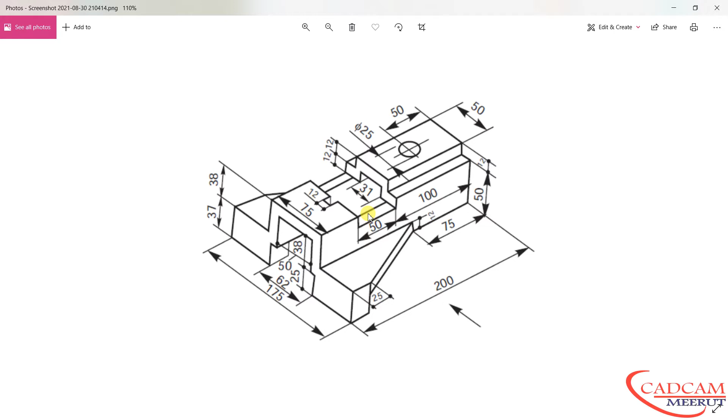So let's start with the NX. Select this sketch, or we can select this sketch directly and click over the plane.

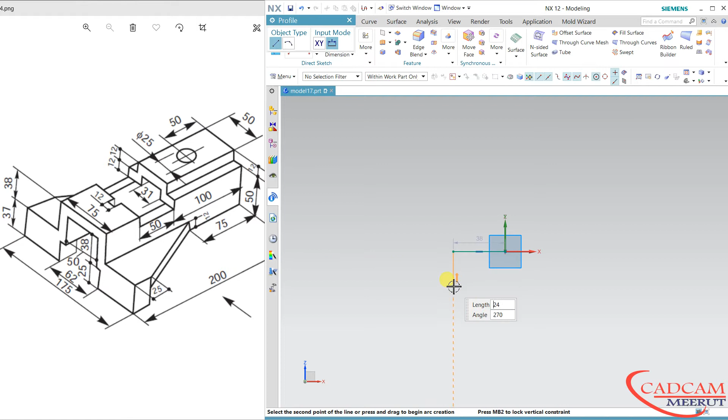I will create this portion and we will extrude this 25 only. So just start with profile. We are starting from this point, and after that I will mirror it.

Make them coincident. Now dimension it: 75 divided by 2, 38, 37, 25. This is 25.

38 again, 50. So this is 25 and 62.

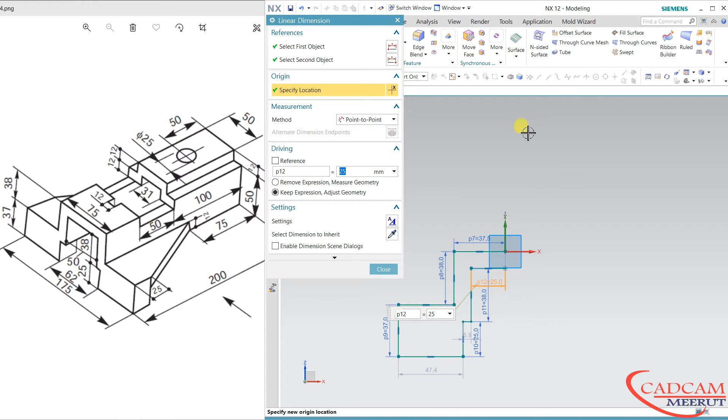So wrap it. Half of 62 is 31 and close. Now mirror this hole. One more dimension is left.

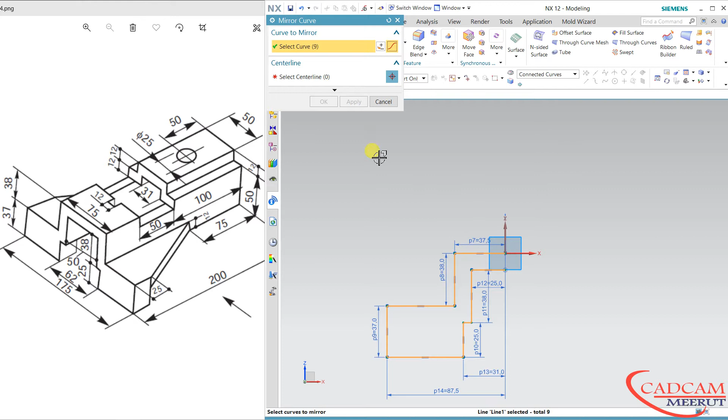This 175 divided by 2. Close, and now we will mirror this. Select this mirror, connected curve, so all curve is select the axis, and OK.

Sketch is fully constrained, so finish this and extrude this all in 25 millimeter and click OK.

So first sketch is completed. Now we will create this upper portion only.

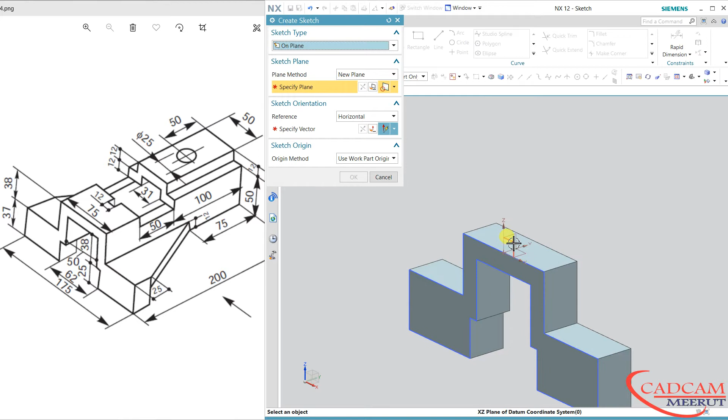Again I will sketch over the same plane, and draw this shape.

Actually we need this sketch. Okay, after this first we have to create this shape up to here, and again this shape has been changed.

Now finish it and extrude this sketch in reverse direction.

Or we can do one thing, just extrude this second portion up to 200, and now I will cut this portion.

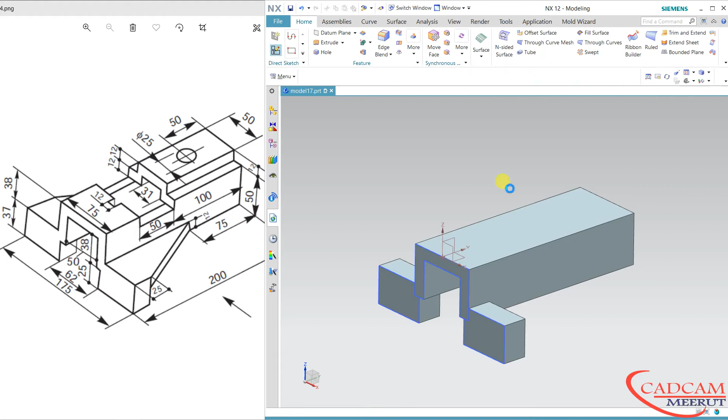So sketch over this face and draw rectangle and dimension it 100 plus 50, 150. Close. Now subtract this.

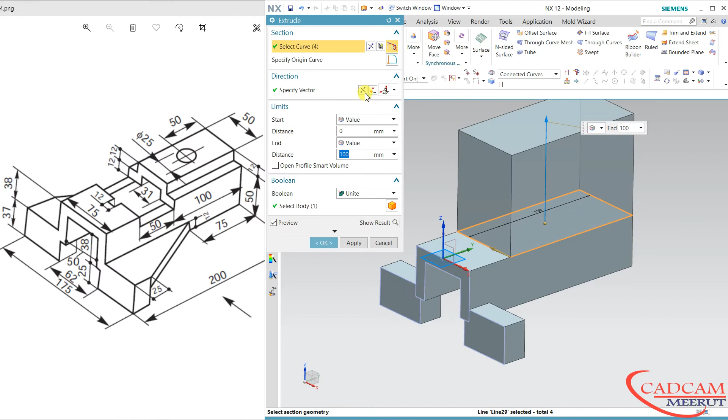Extrude and reverse direction and subtract this to 12, because this distance is 50 and this is 12 mm extra, so 12 and 12, so we will cut 12 millimeter only and subtract it, and okay, so this gap is come.

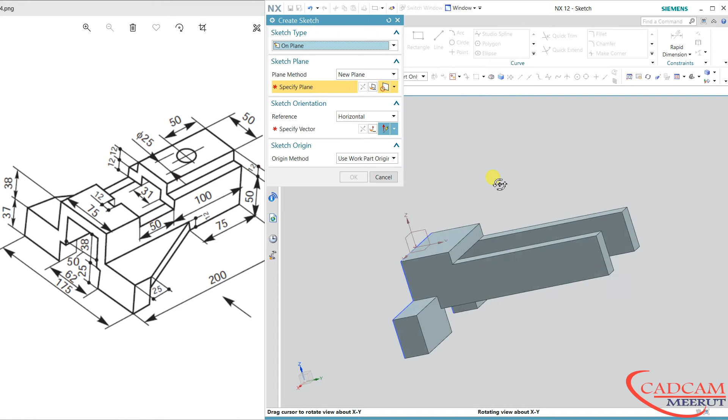Now we will offset this, or we can do one more thing, go to this back face, click, and now orient this with this view, and now I will start from this point.

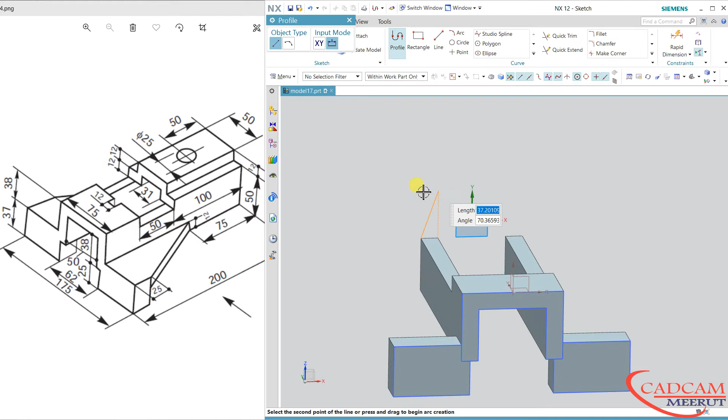Okay, here, then 12 mm above here, and match it to this point. Now a little bit inside, up, in, now match this.

Okay, just match some dimensions, meaning these two lines are equal, and this line and this line both equal. Click and make this line horizontal, and rest are same, just click both this line and make equal.

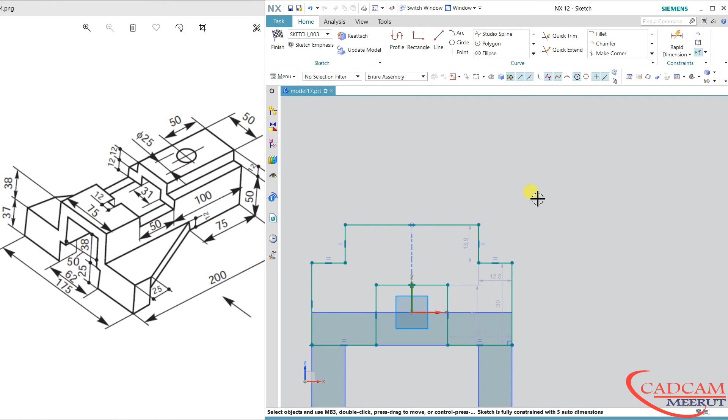Now this point and this vertical axis must be constant, same for this lower line. Now we will dimension, this upper dimension is 50, so select and change it to 50, and this depth is 12, change to 12, and same here, this line is also 12.

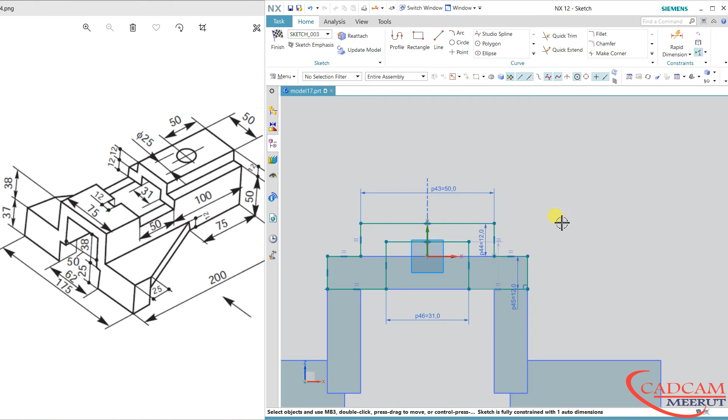And this inside diameter between these two points is 31. It will automatically distribute, and here we have to define this gap. So this is 12.

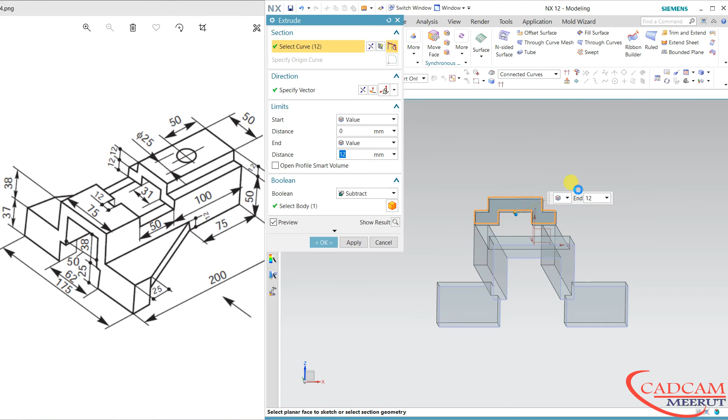Now close and extrude this sketch 12 and subtract, and now see.

Our figure is matching with this isometric. Now we have to create this rib, so sketch over this face and draw a line.

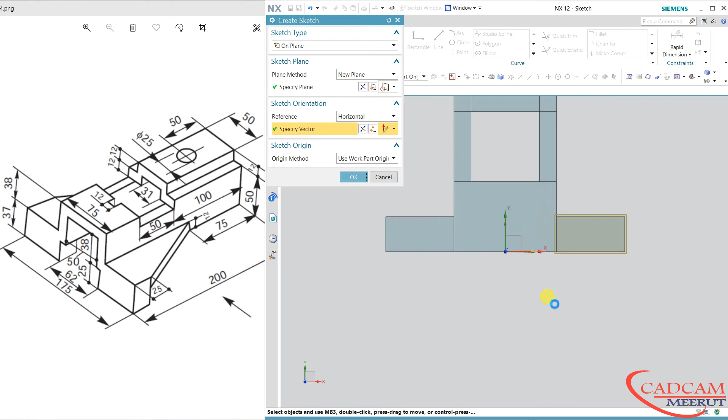And same for this opposite point, or we can mirror it. 75 from the last edge, 75.

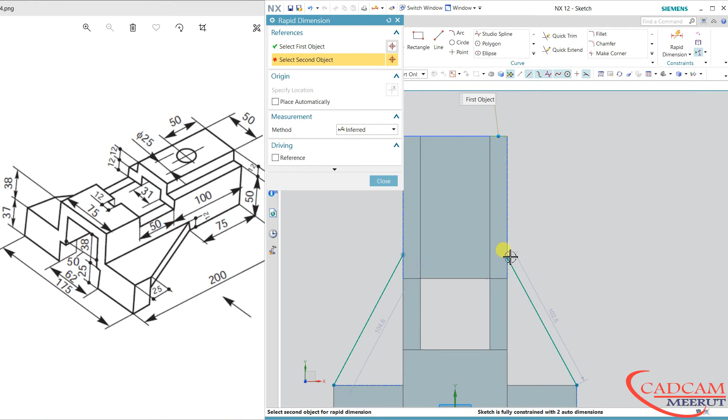Click, match both points horizontally, finish it. Now I will use rib command to create this.

And we will select single curve, select this curve, and thickness is 12.

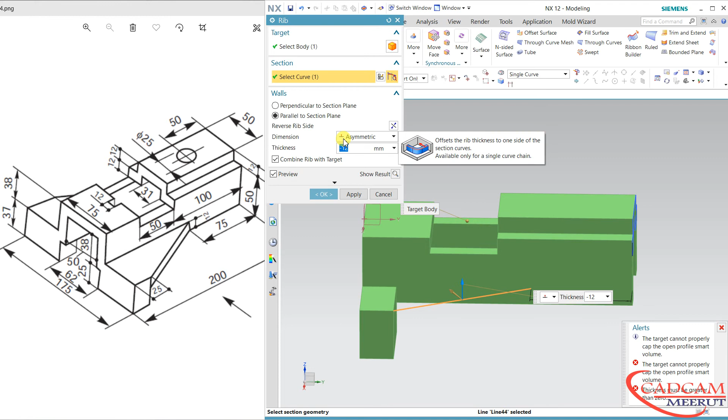Okay, symmetrical, this is not possible. So asymmetric, and minus 12. See. Okay. Now apply, and same we will do with this sketch.

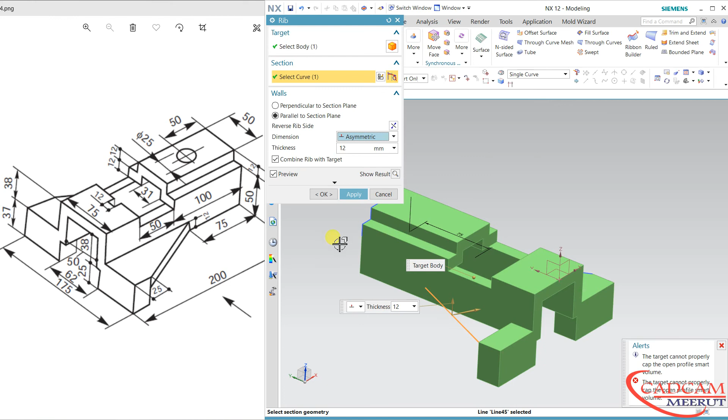Asymmetric 12, and double click over this arrow. Arrow will change the direction.

Only one hole is remaining, so I will use this hole and click over the top face.

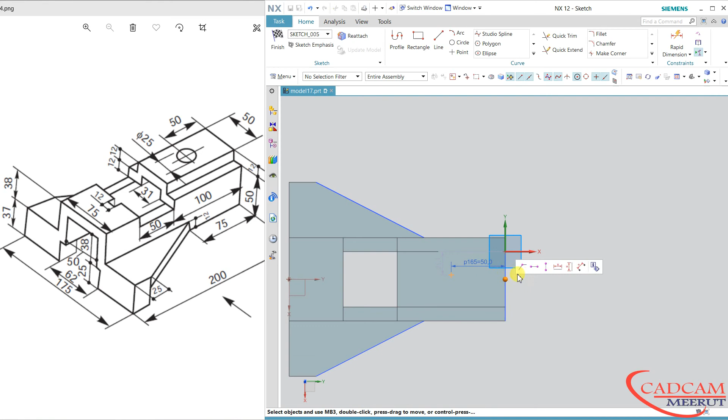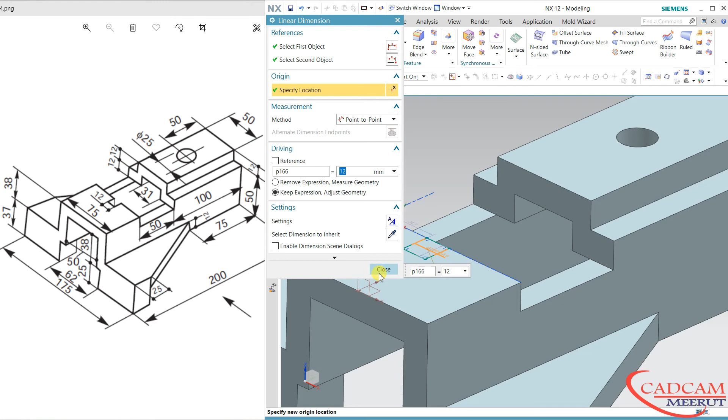One cut is there, so draw a rectangle, double click 12, and same here 12.

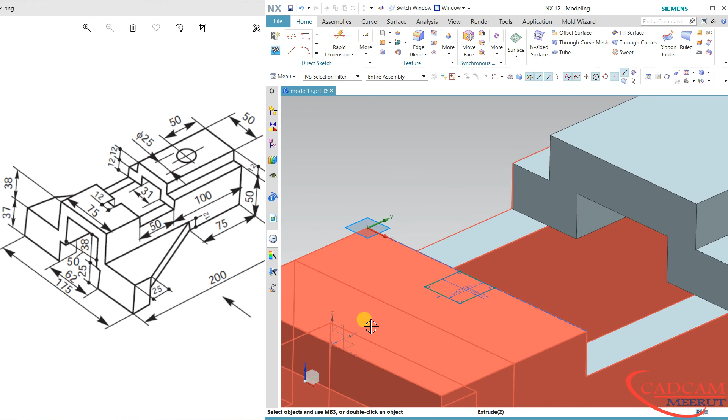Now this point and this point both align, and align vertically, and finish it and cut it.

Reverse direction and subtract and hide this sketch. So this is our geometry.